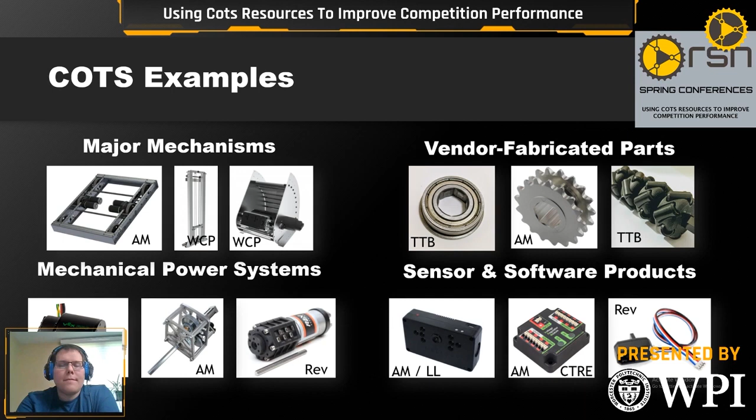Yeah, and just to really quickly mention, when you say major mechanisms, that's a thing that's referenced in the rules, correct? Yes, that's referenced in the rules, and it's also referenced in the definitions too. So you can read about what's considered a major mechanism, and it tends to be kind of ambiguous, about something that could accomplish the game challenge. So you really have to read the Q&A each year to understand what is a major mechanism.

So I don't really want to get into all the BOM rules and the cheesecaking stuff. Oh yeah, totally. But yes, it makes sense to understand what the rules for major mechanisms are each year, just to make sure you're on the up and up for understanding what's going on in that space.

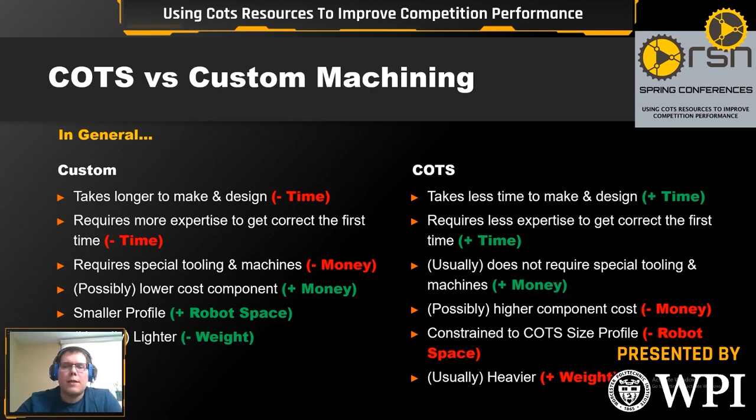So it's a trade-off back and forth that you have to make as you analyze what you do. Every year on all the teams I'm involved with, there's always that analysis about whether you just buy your way out of the problem or you design something custom in order to make it work. So it works both ways. There's a time and place for both. So let's move on to the next slide.

Yeah, go ahead. Just to break in really quickly, something that people who haven't done FRC or FIRST for a long time might not realize. You've been doing it for 16 years, I'm in the same realm. Wheels have mostly always been COTS, off the shelf. But there was a time before they had wheels designed for FIRST robots, right? They were literally wheelchair wheels you would just slap on, or teams would cut them out of wood, which is wild to think of now. It's crazy how far we've come.

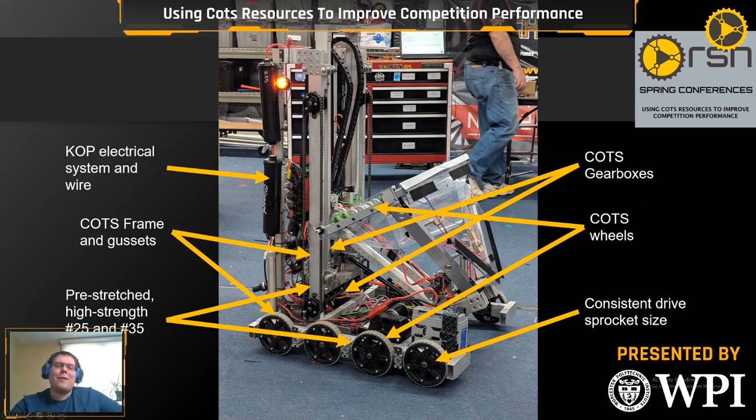Yeah, my how far we've come, right? Yep. Yeah, or when people had to machine their own sprockets. Oh, yes. I mean, yeah, yeah. These days it's very different. That's for sure. All right.

It just goes to show you that even when you get to those levels, when you get to some of those main core materials, a lot of teams, the easiest thing is just to go the COTS route and just make sure you're designing around COTS every step of the way, unless you really think you're going to get a serious competitive advantage for not doing it. And that's getting a lot harder these days. You've got to look to something like 125's wheels from this past year's robot if you really want to get to the world of redesigning the wheel.

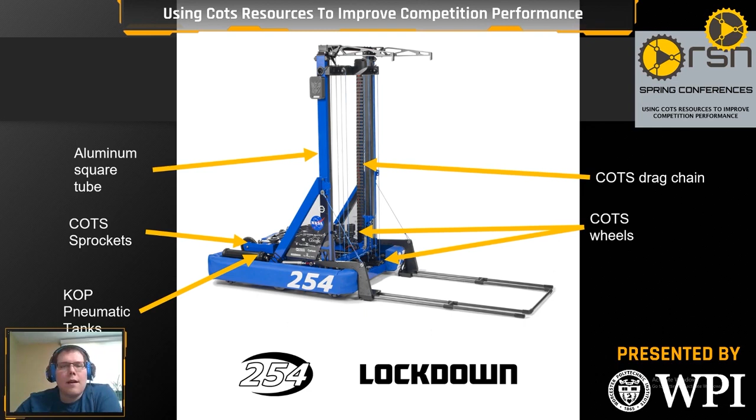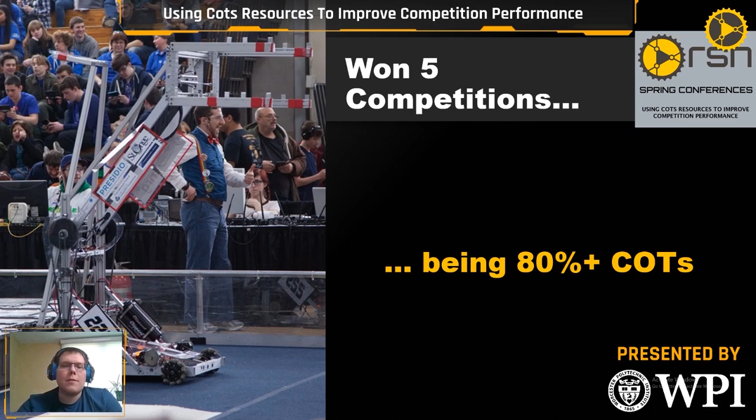All right, moving to the next slide. Now, next, we're going to cover COTS in mechanisms. So I'm going to go through a lot of the core FRC mechanisms, and we are going to look at how COTS are incorporated and ways to incorporate COTS, and just some of that FRC tacit knowledge that I talked about before, as much as I can offload here about designing these different types of mechanisms and incorporating COTS into them, and how you can save time in your build.

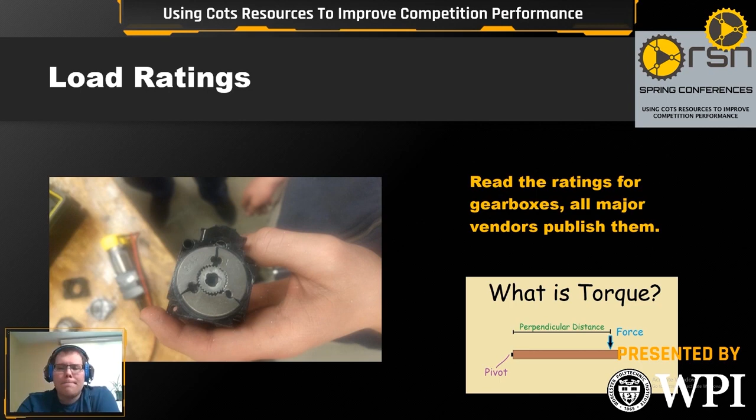You want to go ahead and move to the next slide, Francis? Okay, so now I'm going to start going through some of the individual COTS items. One of the items that's often underrated: the kit of parts chassis. There are some elements of it that reduce your amount of flexibility, in that you're kind of constrained to some of the wheel positions that you have there, but there are many ways to modify the kit of parts chassis to get it to do what you need to do, and it's certainly going to speed up your drivetrain build more than any other option that you've got.

So with that, there's numerous upgrade kits that are available. We've got 8 wheels, pneumatic wheels. You've got Mecanum wheels, if it's a game like 2015 again and you want to use those for that. There's a ThriftyBot plate that you can buy that makes it so you could put 3 motors on it, so you could do 3 brushless motors, like a few top teams did this year on their drivetrain.

It gets to the point that you basically have all your plates set up, and then you're just struggling with figuring out how to mount stuff to the top of it, which isn't near as bad of a problem as screwing up a hole in your drivetrain when you're building a custom one, or messing something up with some of the more flexible custom drivetrains and having to redo it. Here, this is a much cheaper option, and you've got quite a few options to modify it.

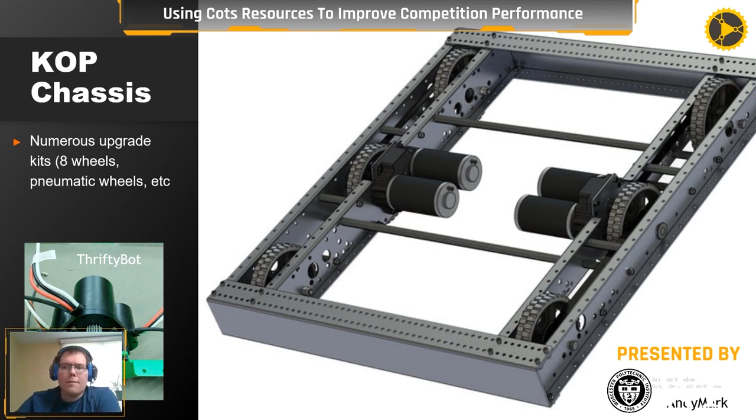So then when we look at the Versa chassis next, this is one of the other very popular options. I myself, with 225, have essentially used a version of the Versa chassis every year since 2014. And before that, it was the Kitbot. The nice thing about it is it allows you to be very free with where you put your wheels and holes, so you can basically take a hole saw or a stepper bit, put a fat hole through the side of the frame in each of the wheel locations approximately, and then you use these bearing blocks

which you put a bearing in each side, and then it's a live axle system for transmitting power to one side or the other of your drivetrain. And you power all your wheels. You can make some of them Omni wheels. You can make pneumatic wheels. A whole bunch of different options, and your drivetrain can be as long as you need it or as thin as you need it, and it still can work out.

So use whatever transmission you can that interfaces well with the blocks or with the side of your frame. All of that is possible, and it's a very flexible system to use. It does have some weight stuff that you have to be careful of, in that you're adding a lot of these bearing blocks, and that's heavier than you'd be with the case of like the kit of parts chassis.

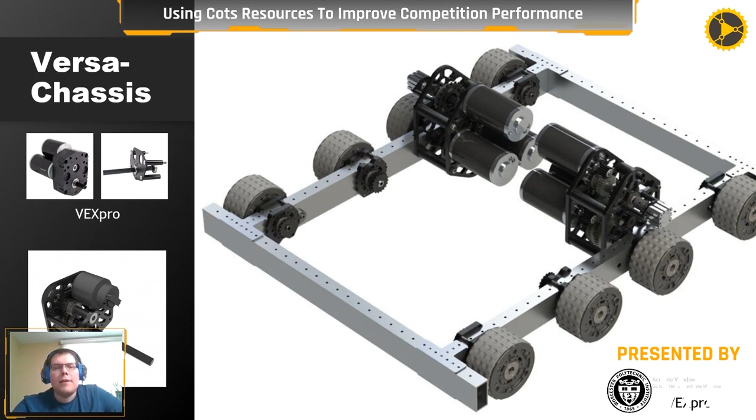And then the fact that the center drop is built right in there, that you can drop a 16th inch by turning them one way for the center, and then they go up a 16th inch on the outsides by turning them the other way, is a useful thing for teams to have in the toolbox. And if you're not looking at these now for whatever application you have, it certainly makes it a lot faster to make tensionable chain runs on whatever mechanism you're doing. Yeah. All right. So moving on to this next slide.

So I have some of the swerve options that are available on the market right now up here. I haven't actually used any of these, but I have used swerve through 2481, so I could speak a little bit to what's important. A lot of these you've seen great success from many teams. To name them off, AndyMark, I believe, was used by 3707. It might have been a modified version, I don't know for sure, but they won worlds last year.

1323 won worlds last year with one of the West Coast Products versions here. The SS one, I believe, is new. Someone correct me in the chat if I'm wrong. And then the Swerve Drive Specialties one, I mean, Jack in the Bot did amazing last year with that one there.

So there's a lot of battle testing that goes on in these swerves, and it's not as hard to do swerve as it used to be. It's more of a learning curve around the programming side, making sure that you've got the training on that end, and then just hitting the purchase button on the COTS end, and you can get something that's almost as good as something you design yourself, much faster.

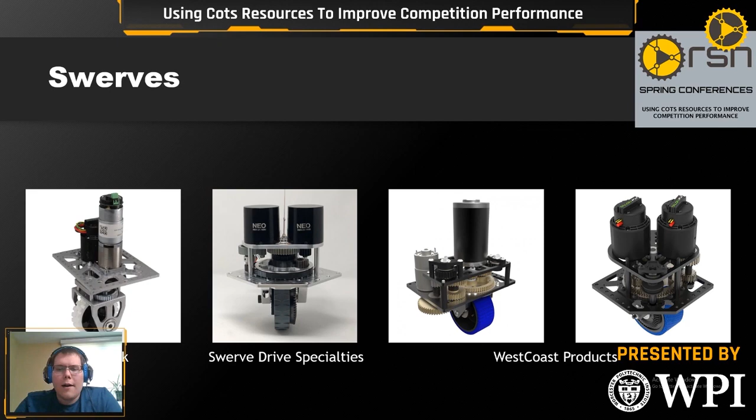So keeping these in mind, it adds to the price a little bit, not a lot. But really it's about getting the utility of swerve, and then you could just bolt it on some 2x1 tube and go from there. All right, go ahead and move on to the next slide.

So let's talk about elevators. So when we're looking at elevators, a lot of vendors have elevator kits. They're all a little bit different. It kind of depends on what you're going after. And I think some of them have kind of seen iterations over several years. So going back, one of the first ones out was the VEXPro one. That one came out in 2015, in response to the 2015 game.

So it uses some of the smaller bearings and really gets you some of the plates, and they sell some of the bearings too and some of the spacers, but then you have to get some of the bolts from other locations. So it's not necessarily a fully encompassing elevator kit. It is a little bit on the sloppy end too.

But one of the nice parts of it is it's built so you can, if you're making a single stage elevator especially, go to some of the plates that they have for the inside. You can actually sandwich the whole elevator between two sets of bearings in the left right direction, which is not something that you can necessarily do with every elevator kit. So that's kind of nice.

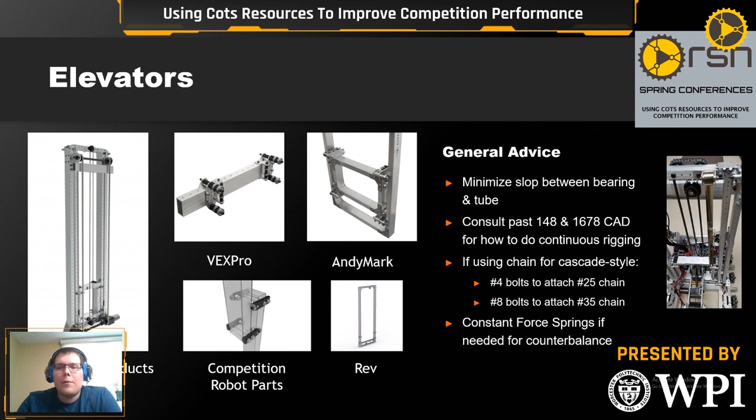If you're doing cascade style and you're using chain on it, like what you see over there with the elevator, what you can do is use number 4 bolts for number 25 chain, or number 8 bolts for number 35 chain, and that will cover it for you. If you need them, constant force springs, but we have so much motor power these days that sometimes you can get away without it if your elevator's light enough. That's elevators in a nutshell from a COTS perspective. It's one of the popular mechanisms to have as COTS. Let's move on to the next slide, unless you've got anything, Francis.

All right. So I've got a couple slides on arms and wrists, kind of putting them as a catch-all here. It's basically rotary joints. It used to be that the elevator was the harder mechanism to do. Now I think the arm has become the harder mechanism, just because there's more thought that needs to go into weight and things of that nature. Whereas with the elevator, you can kind of buy an elevator off the shelf, and you don't have to worry too much about the moment on your mechanism, and instead you can worry about just getting it to go up and down.

So the number one advice always with arms is you want to minimize what is on the end as much as possible, because it makes your life far more difficult control-wise, especially when you're dealing with a heavy weight that's swinging around at different heights and is counterbalanced differently at each point. I've found gas shocks to be one of the easiest ways to counterbalance arms, and designing them in from the front end is probably good to do. Like you see that 254 arm right there. They've got gas shocks attached to that sprocket to help counterbalance it.

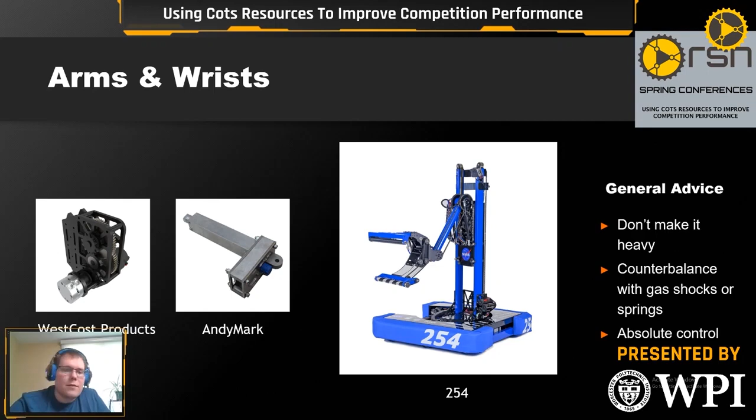I will say the lead screws do a very good job of making sure your arm is steady when it's up, so you don't need to have something like a counterbalance from a gas shock or anything like that. They do a very good job of keeping things rock solid steady when they're up and not bouncing. You want to move to the next slide?

Okay. Some other stuff I want to talk about here. On the right side, this is from 525 in 2015. I'm doing it in arms, even though it was kind of used in more of an elevator application. But this is just showing how the disc brakes work. Some teams, I know 1678 used them in 2016, I believe. But a few teams use them here.

Basically what you do is if you have one of these disc brakes, you can attach it to one of the shafts. Some of them have hole patterns that are similar to a standard hub pattern. Then you run the disc brake back to a pneumatic cylinder, and the pneumatic cylinder pulls the cable, and then the brake tightens around the disc, so it can help hold stuff in place.

So you could use it on an elevator if you need an elevator to hold up, or you could use it on an arm if you need to hold an arm up. It's one other way of doing that to prevent your arm from drifting down. Real quick question: that brake, where would you get one of those? Is that just literally like from a bicycle? You could do it from a bike shop.

I've never actually used them myself, but I wanted to make sure I highlighted them because a lot of teams do use them. I've seen quite a few of them on Amazon, considered purchasing before. It's just a brake from a bicycle that you put the whole system in there and then shorten the cable and then use a pneumatic cylinder to pull the cable to basically tighten the brake around. But yeah, that's essentially what it is.

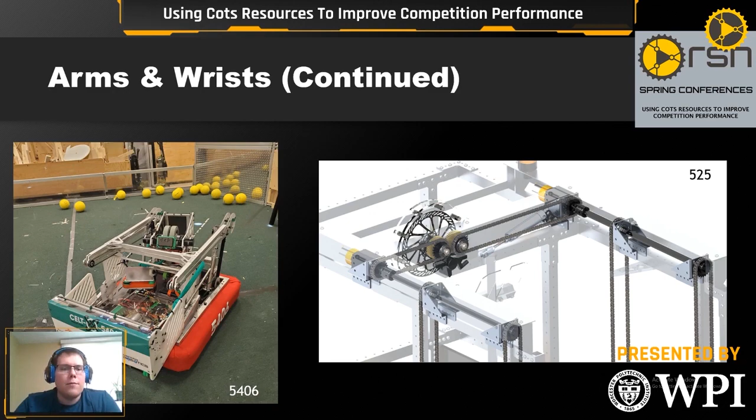or whatever config that you want. And so as one is turning, that sprocket turns to raise the arms. So just highlighting another couple cool things you can do here with some relatively simple components to pull some cool stuff off. Next slide.

All right. Another one I want to talk about here is you don't necessarily power your arm off of the main stationary thing. You can power it off the thing that's rotating. So that's what you see in the image on the left. That's 225's intake from this year, where we didn't have space to put the motor on the inside, so we put it on the gripper.

So basically the sprocket that's attached to the upright there, that one's just stationary, and the motor on top is what rotates. So it basically rotates, and that bottom sprocket is stationary, and it still brings things in. Obviously, you've got to deal with wire management, but it's another technique you can do.

On the robot on the right, just highlighting here, sometimes you've got multiple stages of arms that you're working with. And for each stage that you're going out, the more weight is held out from the robot, the more you have to be ready to address forces such as gravity that are going to want to pull your arm down.

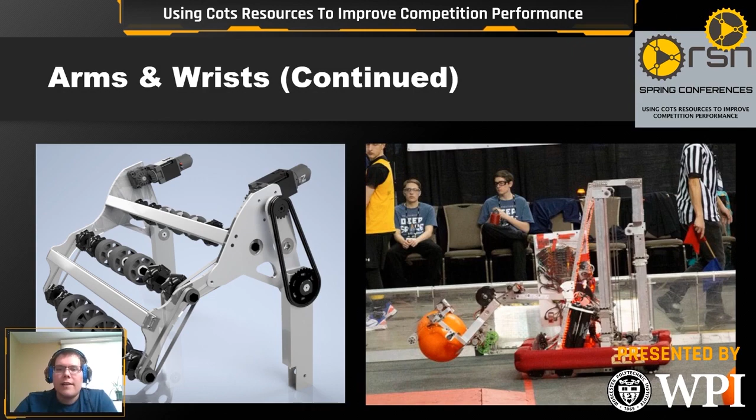So for instance, this was 2019. The arm on the inside, those motors, we had two 775 Pros, and the one on the outside, that was just a bag motor. So just highlighting a little bit on power difference needed. So go ahead and move to the next slide.

All right. Don't want to spend too much time on intakes because I think that they're already pretty popular, and there's a lot of options available out there right now. It is different between round objects and square objects. So when you're dealing with these square objects, we've usually got the side intakes like 2018 and 2015, especially when you're trying to drop the square object down square, like we have in these games. That's where we've seen a lot of these side intakes.

For balls, the top intakes seem to typically be better, because sometimes there's stuff on the field and you have to run over it and then pull the stuff in. Now that we've got a nice mix of mini Mecanum wheels, mini Omni wheels, mini squishy wheels, mini hard wheels, basically everything under the sun, it becomes pretty much a task of, whatever the game piece is, just mix and match and try to figure out what works best in that particular case.

So you see the two RA3D robots on the far left, where we basically just mixed and matched small wheels until we found something that worked really good. The one in the middle, that's 5254. I want to highlight that one because they ended up, especially for IRI, turning that robot into a robot built almost completely of COTS, intaking similar to that 1114 robot on the right, one of the best robots of the year in 2015.

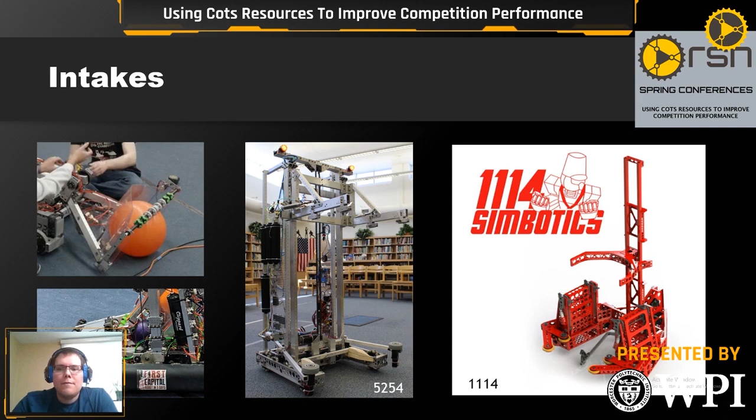So sometimes it's about knowing the config that you need and then just buying the COTS components that can get there, and you can get almost to the level of what those really good robots are doing just by purchasing these components. Let's go ahead and move to the next slide.

So looking at turrets, the big things you want to make sure of: you want your backlash limited, and you want wire management. You can do that with wire sheathing or energy chain, and strategic placement of surgical tubing, and there's a bunch of stuff you can do for that. You're probably not going to get the full rotation, especially with the amount of stuff we need to take up to our turrets these years, like vision stuff and Limelights and multiple motors.

But there are a couple COTS options out there. We've got the Armabot one up here. We've got the Great Turret from West Coast Products up here. With the backlash, there's a couple places it can be in whatever you're running around your turret, if you're doing chain or making a turret gear or something like that. I know this past year 225 basically water jetted a turret gear and went that route, because that was ultimately simpler and less expensive based on the resources that we had.

But for a lot of teams, if you're looking at even what we did in 2013, where you basically buy a ring bearing off McMaster-Carr or from Amazon, loop a belt around it, glue the belt down, and then just turn that. Sometimes there's a lot simpler way. There are really simple ways to get turrets done.

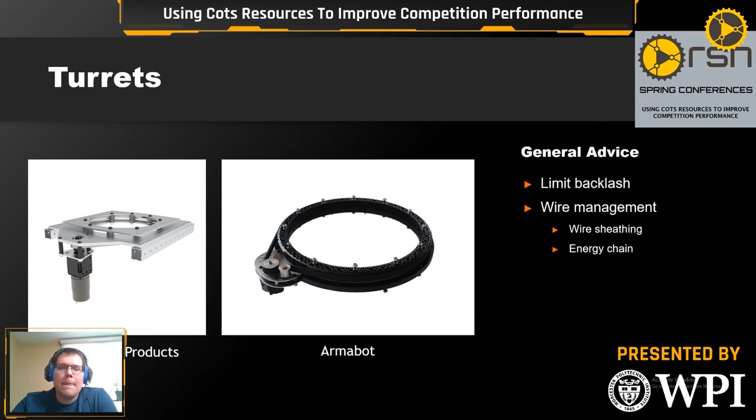They are really easy to use. Yeah, it was very, very surprising. Turrets don't need to be hard for teams. The harder part ends up being the backlash in the motor, to be quite honest with you. Yep. All right. Going on to the next slide.

Like the turrets, I don't want to spend too much time on ball management because it really varies year to year. The Spindexers this year were very different from what we saw in 2017. I've got two 2017 robots up here. But it's almost always the thing that you really want to prototype and hack at for most of the season, because there's not necessarily a cookie cutter way to do it.

But just to highlight a couple of the common methods, the one on the right is basically McMaster flat belting on a bottom powered by a 775 Pro motor that sped it into a shooter and then just shot out of there. It's a way of, when you're double shooting or something like that, just brute forcing it. You could probably also shoot them into a linear path, like 118 did that year, with simple belting like that, and run it up to a shooter that way, to single file things.

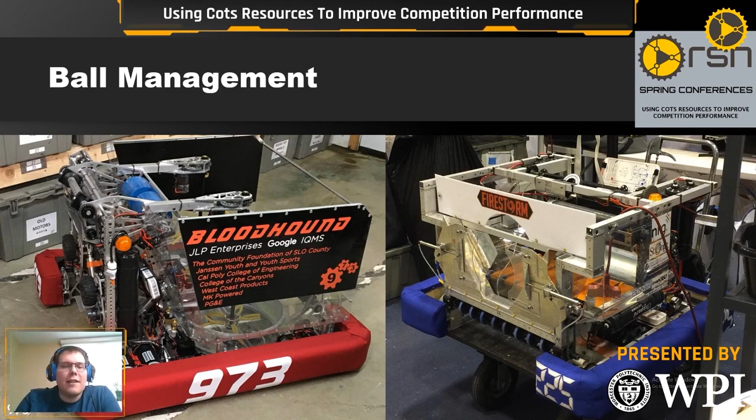It gets the job done, especially if you're looking for an easy way of getting out of the problem. It's not going to get you to the 100% level, but it might get you to the 90% level. And looking at the 973 one, that one won worlds. They've got a bunch of other custom complex stuff on there, but if you actually just look at the system that is doing the indexing of the balls and passing them in, it's basically a stick going down with some surgical tubing spinning down there at the bottom. So it just goes to show you, sometimes you just need something that spins in a circle and then just kick it in there. Let's go to the next slide.

So looking at shooters, a couple good robots on here. The 2056 one highlights, better than a lot of the ones I've seen, just how useful the rails are. It's very good to have a couple rails when you're shooting. Or in the case of the 2481 one over there, we actually have a crown instead, so the ball follows the crown. But something like that to keep the ball centered left to right. Besides all the other shooter stuff you need to worry about, like making sure the control's consistent, the feed's consistent, the optimum compression, and all the normal shooter details that you need to hack at most of the season, just making sure those balls are centered. There's not really a good COTS solution for that.

There is the West Coast Products Greyt Shooter down here, which has a backing on it. Wish it had a rail, because we found they tend to be very helpful for making sure your left-right is nice. But if you don't need to worry about left-right that much, good option, just purchase something like the Greyt Shooter and go that route. There are definitely numerous shooter wheels. Shooters are one of those things that you could make your side plates out of wood if you really needed to. It really comes down to making sure that your rail's consistent, the feed's consistent, and all that stuff. Let's move on to the next slide.

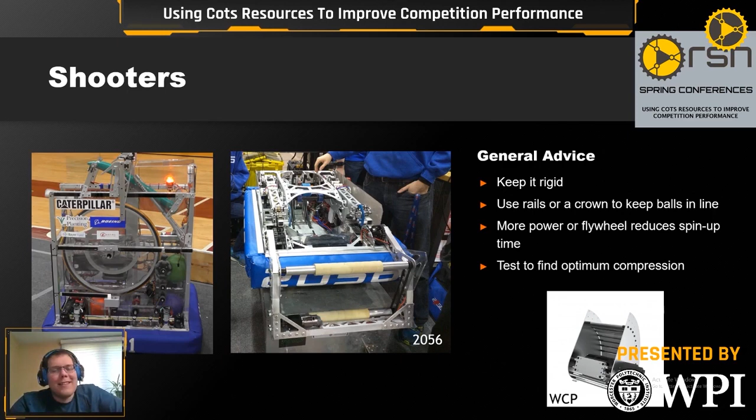All right. So looking at some of our off the beaten path COTS. This is just some of the stuff I've stumbled along over the years that's not necessarily sold at one of the major vendors, so we just want to make sure it's highlighted. Besides some of the stuff that's more known, like Automation Direct, and I think AndyMark sells them now, different components for the pneumatic system, making your gauges small and reducing weight that way. This is a few of the ones that I've run into.

So this Adafruit IR beam break sensor, it was $6.50. Works great for ball indexing. Haven't run into issues with that. Was very pleased with that. I found that when I came to 2481 and they were using this thing. I was like, oh, that's cool. Thomas, can I break in real quick? My team's always been using the old banner sensors we used to get in the kit of parts back in the day. How does this compare to those? Are they just as good?

Well, this one's got more of a defined range, I would say. So it was useful in putting in a ball path. I still use the banner sensors quite frequently, especially 225 used them forever, especially for ball intaking. When you pull something in, you adjust the little screw on top, so you know the position, you know when something's intaked, and then you can turn the intake off. That's where I've used those more.

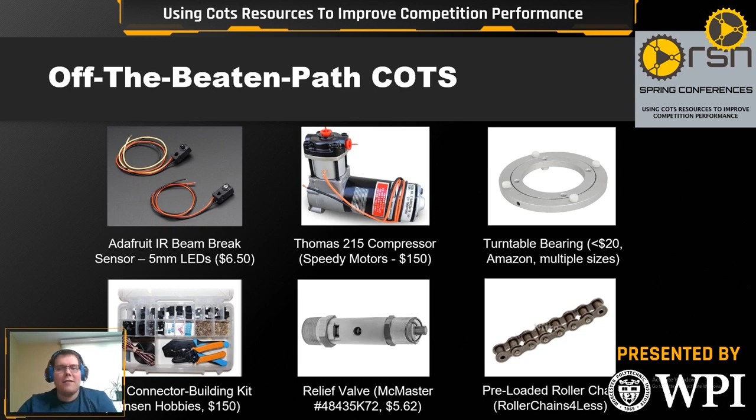All right. So I see I'm running closer on time here, so I'll try to speed along. But I'm going to talk a little bit about optimizing the build with COTS. So this is just some general tidbits about, when you're dealing with a primarily COTS robot, how you want to structure how you do things.

Okay. So one thing you want to worry about is standardizing. So 225 standardizes on Neos right now, standardized on CTRE stuff. Depends on how you want to do this. Different teams like different products for what they're doing. If you try to move around something that's a little more standard, you're going to put yourself in a position that you know how the thing works and you can deal with its eccentricities when they come up.

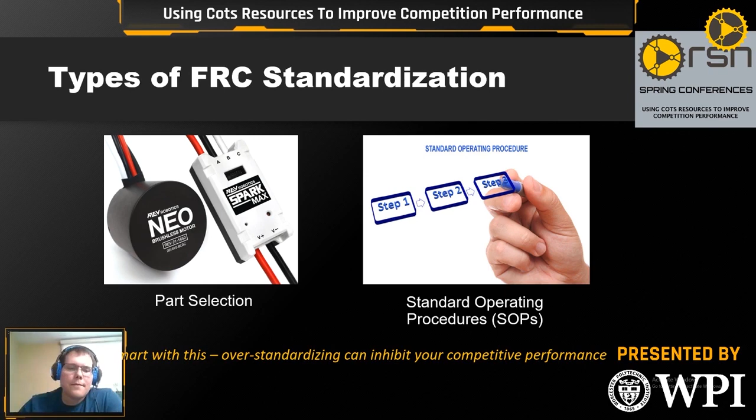And standard operating procedures, SOPs. So many of us in industry are familiar with that. For those of you who are not, it's basically you've got a process for how to do something and you go through that process. Now, with that caveat, obviously, you don't want to over standardize and inhibit your competitive performance. You don't want standards for the sake of having standards. You want standards because they make things easier for you. So moving on to the next slide.

This would be a standard operating procedure for making accurate chop saw cuts for 225. So there's always a little bit of anxiety with the chop saw that if you're holding something wrong, it can fly back in your face. So we're very careful with who gets to use the chop saw in our case. So here's how we work that through, especially when we're cutting metal.

So the student gets a drawing of where the part measurement should be. Student gets material and marks the location. Another student double checks them, hands it to a mentor. Mentor makes the cut where the student had it, and then the student checks that the mentor actually cut it correctly.

So it's not necessarily documented anywhere besides word of mouth here, but it's outlined that this is the process. This is how the process works. Follow the process every time, and then we can get a repeatable result each time. Especially when it's something like this that's pretty cut and dry and linear. That's kind of how we're doing this and what we do going forward.

And just real quick, do you have any experience with using cold saws to cut aluminum or something like that? I've seen some teams use them, and they say they're a lot safer. They are, and I agree. The problem is they're a little more on the expensive side than just having a chop saw like this.

I used one when I was with 3504 briefly, and they had a cold saw there. A big fan of the cold saw. I love the cold saw. I think that they're very useful for teams to have. The problem is it's a little more expensive, whereas a chop saw is a lot more in the achievable range for teams.

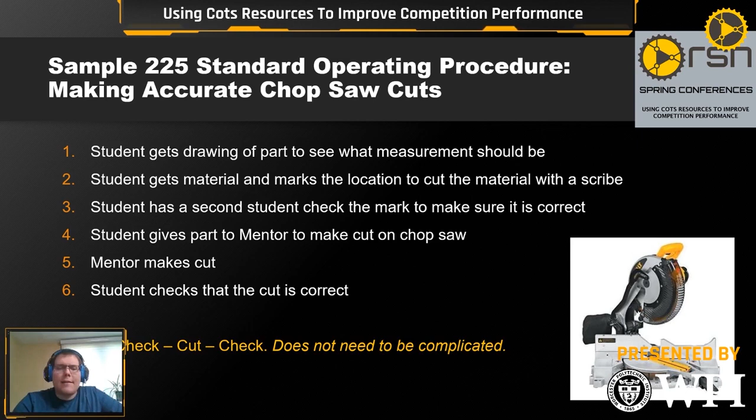Yeah, I'm in charge of safety for my team, and I generally have a similar policy there, where if we don't know the safety, we have a mentor or someone with more experience do it, and then figure out an SOP to bring it down to the students. Yeah, exactly. All right, moving on to the next slide.

So, when deciding how you're going to do something, I've got a snippet here from JVN's Week 4 blog from 2019, where he talks about how they relied a little too much on 3D printing out of the gate. So you've got to recognize what your constraints are as you go through your build. Know what machine or what person is going to be the bottleneck in terms of specialized skills, so that you can parallel process as much as possible and get things done as fast as possible.

So you see some of the key questions over there to the side. How long is this going to take to make? How do we get it done correctly the first time? Can we get it done faster and easier? What's the bottleneck in your process right now? And one of the nice things about COTS is they can minimize the time to make and the time to design, even if you're punting a little on achieving the 99.999% robot. Instead, you're getting the 99% robot. So let's move to the next slide.

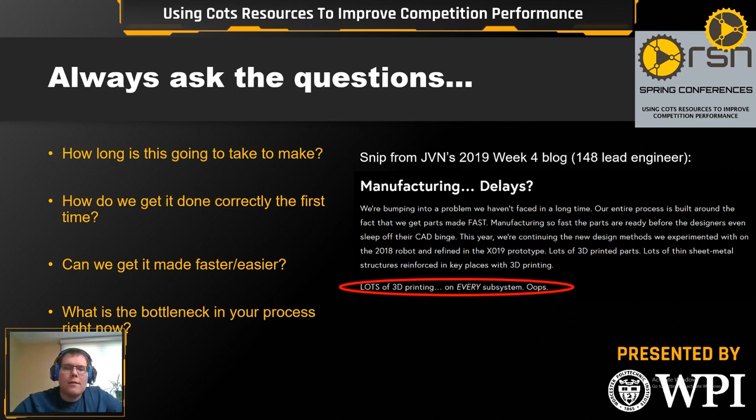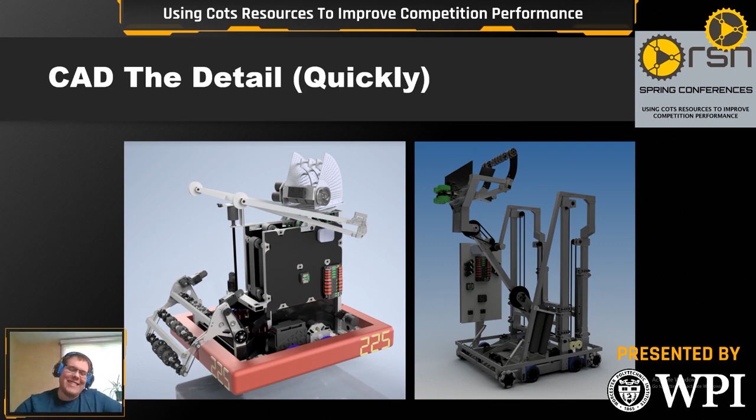Yeah. All right, let's move on.

All right. So if you have no CNC, there's a nice easy way to do it. If you're not aware of this method, hope to make you aware of it now. You can print your CAD drawing out on a 1-to-1 scale. You cut it out with a pair of scissors, tape it to the part. You center punch all the holes, drill all the holes through, cut around the edge of the part.

And you look at this robot over here. Basically, that whole back climber was made that way because the mill was constrained at the time. So if you need to make custom gussets, you can make custom gussets that way. Just highlighting that there's a bunch of ways to make simple stuff that way.

With a few of the students, we did a whole bevel geared color wheel mechanism with some custom plates this past year, a prior iteration of the one you saw in that picture, that basically used this method for the entire thing, and it was accurate enough, and got the holes lined up and everything, and it still works.

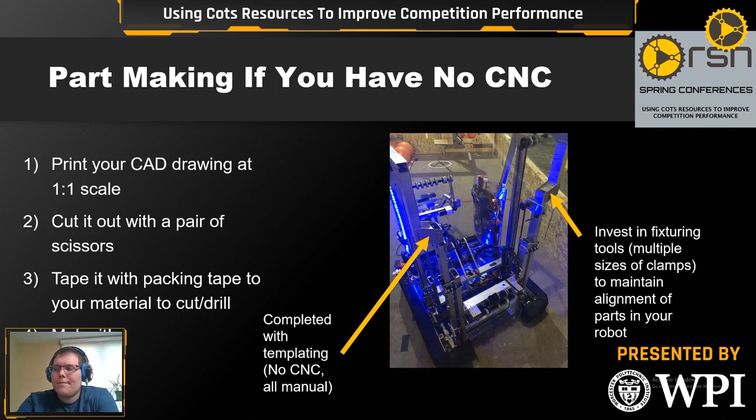So just highlighting, sometimes it's not necessarily going to be right 100% the first time if you make a mistake doing it, but it's certainly going to make your accuracy a lot better than just totally freehanding if you don't print it. Let's move to the next slide.

All right, so the bread and butter of COTS building is planetary transmissions. So we got a bunch of options available these days. The nice thing about the Vex ones is they can go to pretty much almost any ratio, and you can swap them out super easily.

Nice thing about the AndyMark ones is they're pretty sturdy and bulletproof. Nice thing about the Rev one over here is it's super light. The cartridges can be swapped out, so I think they've got a 3, a 4, and a 5. So you've got a couple different options available on that one. But it only works for 500 series motors.

So understanding your planetaries and what you want to use for those is pretty important, because almost always with your mechanisms, when you're building with COTS, the first stage is almost always going to be a planetary, except your drivetrain. So you just have to make sure you know what's available, how to package them, how to put them in, what their load ratings are, especially what their load ratings are, and that you follow them.

Like if you're an arm, you'll probably follow up with a sprocket reduction or something like that, so it can take some shock loads. So, just understand your planetaries and work through them that way. Let's move on.

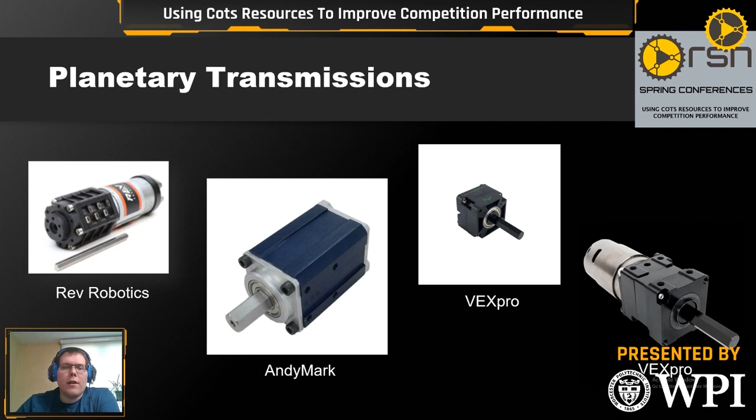So we talked about clamping gearboxes a little bit earlier. So I've got the VEXPro one on the right side. That one's plastic. It works good in a lot of situations. In some cases, we've actually copied the profile of it and built it into a metal version that was custom, just using the same type of profile, because it's such a useful thing to be able to just clamp around a piece of tube, and then you can move it with a cam to tension your chain and have all your gear reduction taken care of.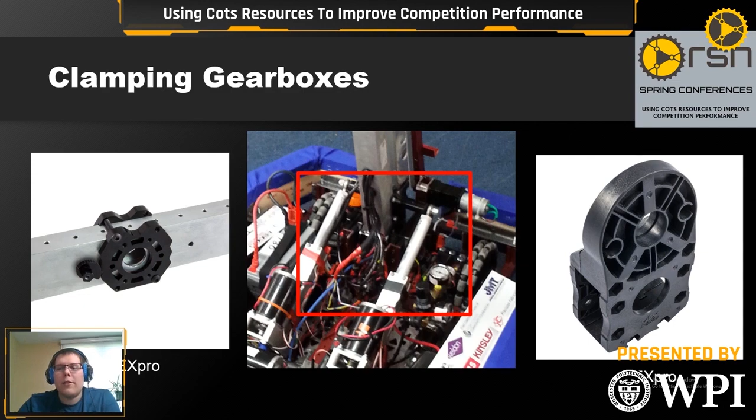And there's also one on each side of the arm as well, to basically be bearing blocks for holding this mega arm. So these things aren't just useful in the drivetrain. You can use them in other spots, just to help be bearing blocks for you. So let's move on to the next slide. Want to talk a little bit about 80/20 for everyone who wants to use that stuff.

We use 80/20 less and less each year, but it was certainly super useful when we were starting out and building things with COTS with less resources than we have right now. So you can look at that robot. The thrower's made of 80/20. The drive is made of VersaFrame, but 80/20 is actually used as the bumper mounts.

So you can drill and tap the top of those there and put a little bolt sticking out of it, and it makes a very easy bumper mount for West Coast drives, which is kind of cool, especially if you've got the 2-inch spacing out, like we do there. So it's nice for that.

I wanted to say, actually, I'm pretty sure that one of 225's robots is actually in the 80/20 catalog. Really? Yeah, actually, I got a catalog the other day, and I saw one of 225's robots in there from, I think, 2014 or something like that. So it's probably this one. I didn't even know. Yeah. So we have an 80/20 distributor. It's one of our sponsors, so that's where we ended up getting a lot of this stuff.

So that is kind of cool, I guess. Yeah, pick up a copy. Take a look. I'll have to look that up. Yeah. I'm surprised you know that. I don't know that. Wow. Well, as a hack engineer type myself, 80/20 comes in sometimes. But go ahead. Sorry to interrupt. Yeah, no problem. Thanks for interjecting that. Yeah, it's probably this one.

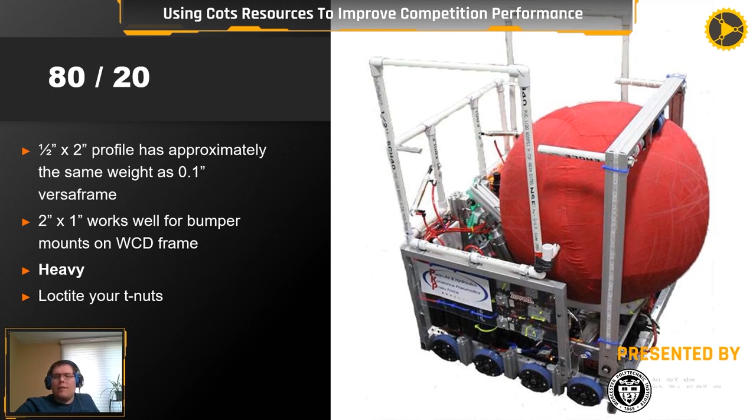And especially for some teams with lower resources, if you want it to just work and drop it outside your frame, it's something that seems to work pretty good for that. It is obviously heavier, and you run into weight issues if you're not careful. And you have to worry about the T-nuts and Loctiting them. So all of that, you just have to be aware of when you're using it. But it's got some applications in FRC, especially with the fact that it has the tapping on top. Now let's just go to the next slide here.

I wanted to talk about wood a little bit as well. So you can see that 2013 robot there on the side. That robot has a crap ton of COTS on it too. Kit of parts drivetrain, won 4 competitions, with a wood shooter and a 2010 wheel bracket attached as a motor guard right up there under that bucket.

Wait, so just to be clear, that wood at the top, that was there at competition? Competition. Wow. Yes. Did you paint it at least? It did get painted a little bit on the front. Okay. Yeah, but the whole thing didn't end up being that way. No, it was a pretty hacky robot built on $1,000, won 4 comps. It goes to show you that sometimes you can have some of this easier hacked-together stuff that basically came out of the kit of parts, and you can still put together something that's pretty good.

We did end up lightening all that stuff up there eventually because it was too top heavy, but at its core, it was a bunch of COTS and cheap stuff hacked together that still managed to do pretty good. But with wood, I think it's not too bad. It's lightweight. You have to be careful if it leaves the frame because it can crack, and then you don't want to have your stuff break.

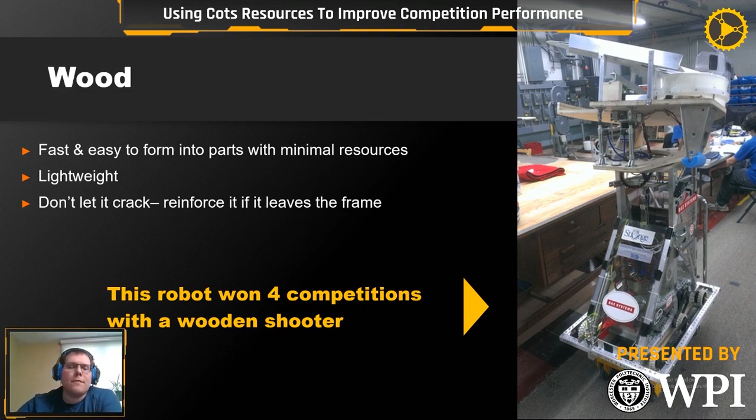We had a couple issues with this robot falling over and cracking the wood a couple times and having to fix it. But it's fast and easy to form, especially when you're dealing with large plate parts like this. We could get these things together much quicker, and this type of robot wouldn't have been possible without it. And, on to the next slide.

So, electronic rivet gun. We started using this one recently. Super useful. Highly recommend everyone get one because it just makes things so much faster. You don't need to lug your air around. It's easy to use in the pits at competitions. Costs about $200, but its usefulness is just so great that I'd highly recommend that teams look at getting these. Makes it very easy to use.

I don't know if you've used one, Francis. I have actually. So up until halfway through the season, we were riveting everything by hand. And then we had a whole bunch of rivets to go on a robot, and I said nope, and drove to Harbor Freight and bought a pneumatic one and a compressor for my cordless drill. So we just moved into the pneumatic age on Team 190. I want one of these, but all of our tools are in the Ryobi or DeWalt line, so I didn't want to add a third set of batteries.

That's fair. We have a DeWalt mentor, so all of our tools except this one are in the DeWalt line. Wow, very cool. Yes. Yeah, it is super. And we've been in the pneumatic age since 2014. And with this one, I don't want to use the pneumatic one anymore. This one's just way better. Great. Wow, I can't wait.

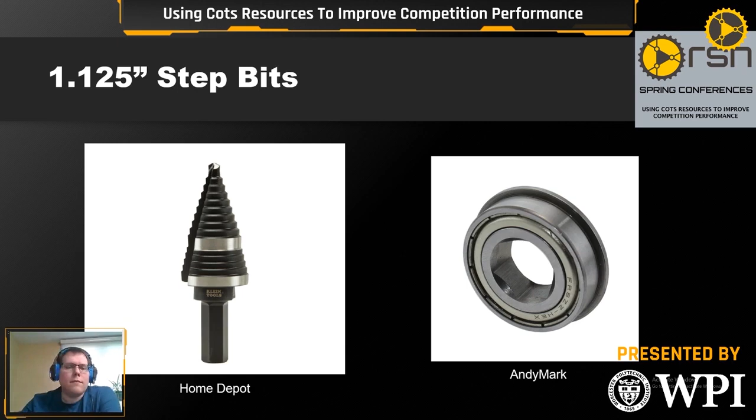Okay, so on the next slide, everyone who doesn't use these for chain also should use these. I introduced these to 2481 this year, and they quickly bought 2 more. The nice thing about them is you can get rid of the master links forever. You may still need to use the 1.5 links or the half links occasionally when you're re-riveting chain. But basically, you push the pin out and then you push the pin back in with the other half of the tool.

So you can see that Swyft one on the right, where it can push it out, and then you flip the chain over, and you can attach it to another piece of chain. Basically, you push the pin out until it's outside of the inner link, but still inside the outermost link, and then push it back in from there. Sometimes you'll push the pin all the way out if you want to detach it completely, and sometimes you won't. I hope that makes sense.

Yeah. I think there's probably a video out there somewhere that shows how to do this, but they've got them for 25 and 35 chain. All the major vendors sell them. Highly recommend everyone who doesn't have one go get one.

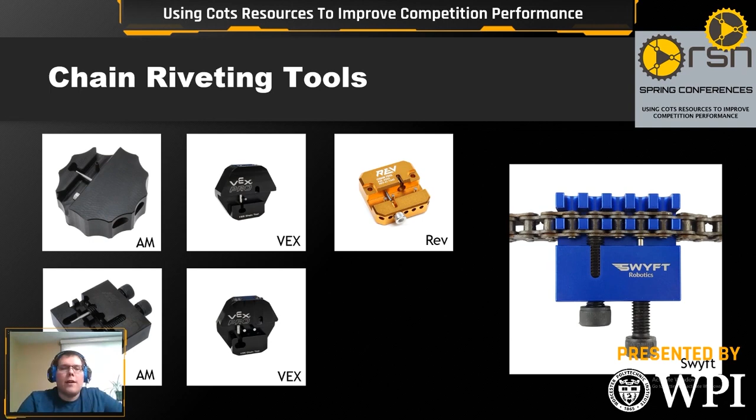My one thing to note as well is that if you think you're going to take something on and off multiple times, you may want to wait until you're done doing that before you use this tool, because trying to break the chain with this on the robot can be a bit of a hassle. Oh yeah, for sure. You definitely want to make sure you can design around detaching the chain. Otherwise, you're going to be in trouble with this. Yeah.

All right, moving on to the next slide. And I think this is my last main slide. Okay, so everyone who's not using drills for tapping, I highly recommend you look at doing that. Way better than manually tapping anything, especially in our case where you use these West Coast Drive axles. These days we're doing a little bit more of using a lathe and putting E-clips on as we've progressed, but this is by far the faster way of doing it.

You probably lose like 1% efficiency in there by the fact that you have a chance that you can compress things down a little bit too much if you do it wrong. But with the drill tapping here, what you could basically do is put a washer and a screw on the end and then sandwich whatever it is. It's super nice for dealing with Churro or Thunder Hex from Vex Pro or things like that, for all the axles around your robot and just attaching them with bolts, and then Loctiting those bolts down.

You can also use the drill taps if you're dealing with things like the AndyMark Peanut or 8020, where they've got these holes at the end, and you can just drill tap into that to basically make larger standoffs for whatever it is that you're working on. So lots of utility here with the drill tap. You could do it too if you've got a piece of plate that you need to put a hole in and then tap through that hole. So many uses here.

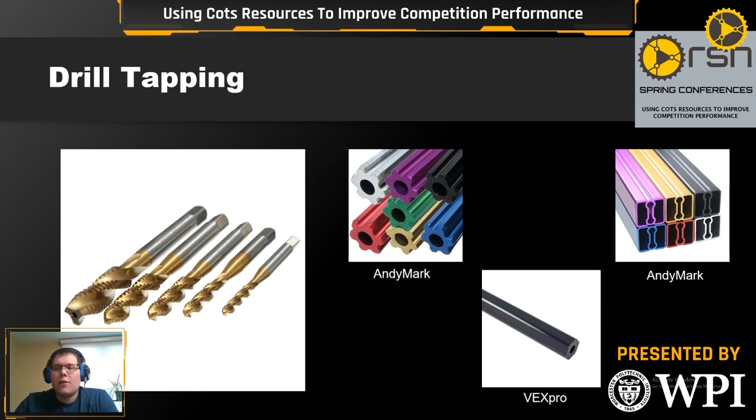All right, go ahead and move to the last slide, and we'll be at questions. All right. Well, hey, that was a lot of fun. Certainly very thorough. You went over a lot of stuff there. But I loved it. I thought it was very interesting. It was a lot, I know. Yeah, there's a ton of stuff in there. I was very eager to see what was going on. It was a lot of fun. Lots of different things to cover.